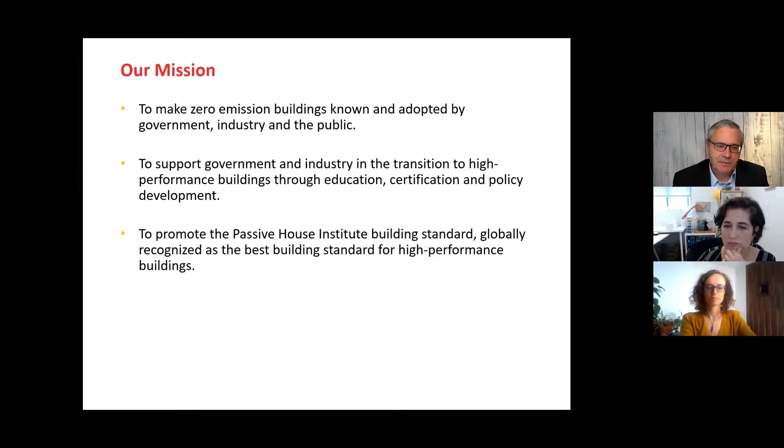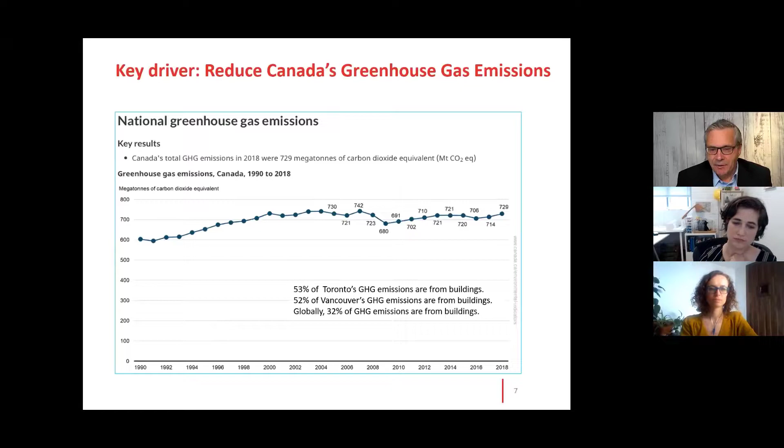So next, the need for high performance buildings. Here's the chart that talks about Canada's greenhouse gas emissions. You can see that it's relatively flatlined, which isn't a good thing if we're to meet our 2030, 2050 Paris Accord commitments to reduce GHG emissions. The argument is there's been real growth in Canada, and the increase hasn't necessarily reflected that growth, but we're still not getting to where we need to go.

Let's go on with the next slide. We know that buildings account for about 30% of GHG emissions worldwide. In Toronto, it's about 53%. Vancouver's about 52% of GHG emissions are from buildings. So clearly, focusing on buildings and reducing GHG emissions through our buildings is fundamental if the country's to meet its climate change targets.

Toronto is making progress, and here's a chart outlining Toronto's progress in reducing greenhouse gas emissions. It's about halfway to its 2030 target of a 65% reduction from 1990. But there's a lot of hard work ahead, especially when you consider that a large chunk of that reduction was because of the provincial coal phase out, the production of electricity through burning coal, phased out at the provincial level by premiers McGuinty and Wynne.

Vancouver, in contrast, has had about a 9% reduction since 1990. I use Vancouver as the contrast because that's the city that really sparked the revolution, I would say, for Passive House and bringing Passive House to the municipal level.

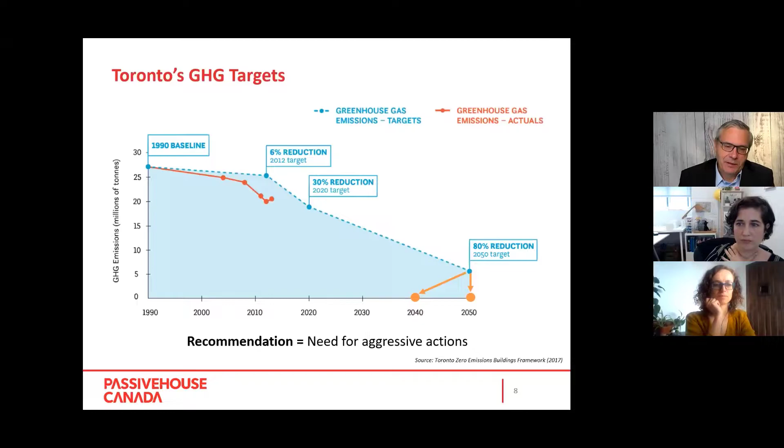Toronto's urban policies focus on greenhouse gas emissions. Their Green Standard version 3, that Marine will get into, means 100% of new buildings will be or must be net zero by 2030. So that's what we're doing in Toronto.

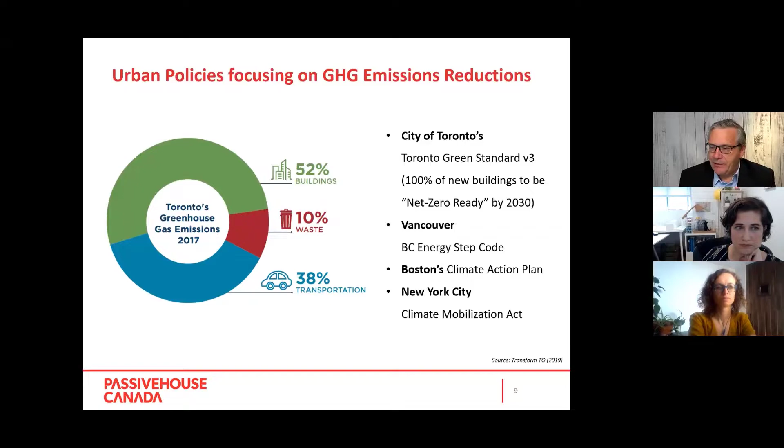In Vancouver, they rely on the British Columbia government's Energy Step Code, which takes them to zero emissions. Other cities in North America with notable policies include Boston's Climate Action Plan and New York City's Climate Mobilization Act.

So where does Passive House fit into all of this need to reduce greenhouse gas emissions? Well, if we look at the space heating needs of buildings in general, the average residential building in Canada uses 121 kilowatt hours per square meter per year of energy for space heating. Commercial is even higher at 203, but by adopting Passive House building principles, that's driven down to just 15.

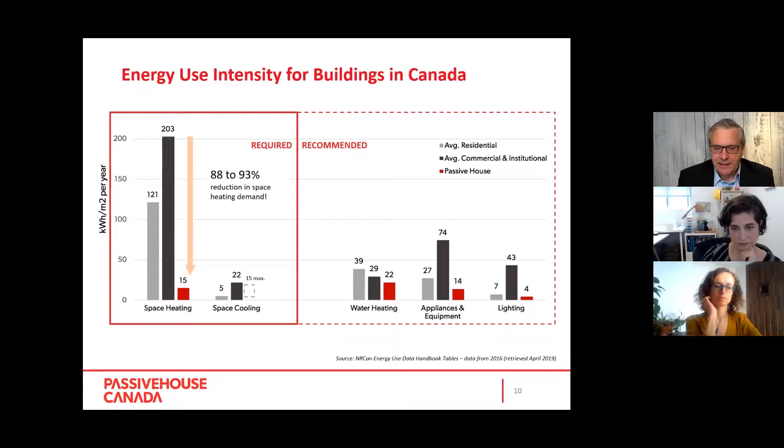So the chart on the far left is the one I'm focusing on here. There's a huge difference between 15 kilowatt hours per square meter per year and 203 in commercial and 121 in the average home. This is the operational carbon it takes to heat these buildings.

We talk about where the marketplace is going, marketplace transformation, and the need for government to act. But in many ways, government has acted. We have the Pan-Canadian framework from December 2016, where all of the provinces and territories sat down at the same table and decided that they would adopt increasingly stringent building codes to get to net zero energy ready by 2030.

The federal government's national building code is looking at net zero by 2050, and the Prime Minister recently announced even more ambitious targets by 2030. So all of the provincial governments are already on board, and the train has left the station, an electrified train, by the way. That train has left the station, and we are heading to that net zero world.

A lot of the work that we do at Passive House Canada is in educating and helping businesses and government in that transformation. A lot of the work we do is working with municipal governments to meet their climate emergency targets, their GHG emission reduction targets, by adopting Passive House standards in their building code.

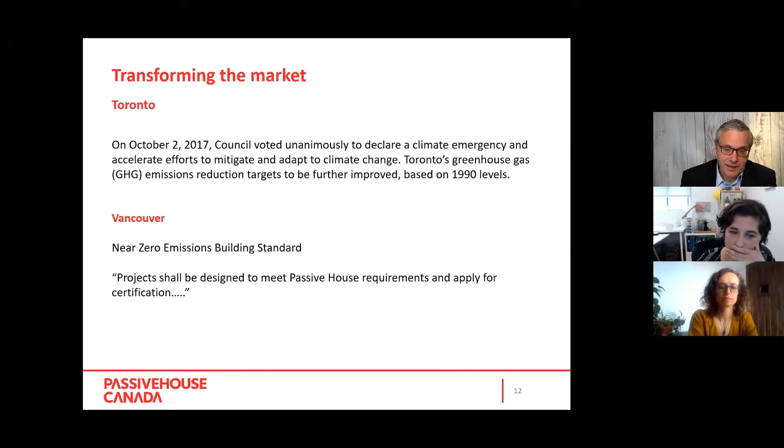So the marketplace isn't about to be transformed, it is in the midst of transformation, which is why we believe it's important that as many professionals in the business, as many policymakers as possible, know about the transformation and are prepared for it, and Canada isn't caught flat-footed.

So we know that governments seeking to create sustainable communities are considering building codes based on the Passive House approach. As we like to say at Passive House Canada, build better, feel better. That's the Passive House way. And this is my tip of the hat to the urban planning that needs to go on, working with architects, engineers, developers and builders so that we build those sustainable communities of the future. Passive House can play a very important role in helping us get there.

Next slide, please. And I wanted to talk about, because I know we're focusing on multi-unit residential buildings, I want to give you some sense of just how big the Passive House movement is internationally.

This is the suburb of Heidelberg, Bahnstadt. It's an entire community that over the past 12 to 15 years has sprung up. Every single building is a Passive House building. There's a multitude of forms. One of the Passive House myths we like to bust is that if you're building to Passive House, you have to have tiny little windows that don't open, and all the buildings have to be squares. That's not the truth. Here's four buildings: a fire hall, residences, some office space, and a nursery school, all built to Passive House over the past few years in this new community.

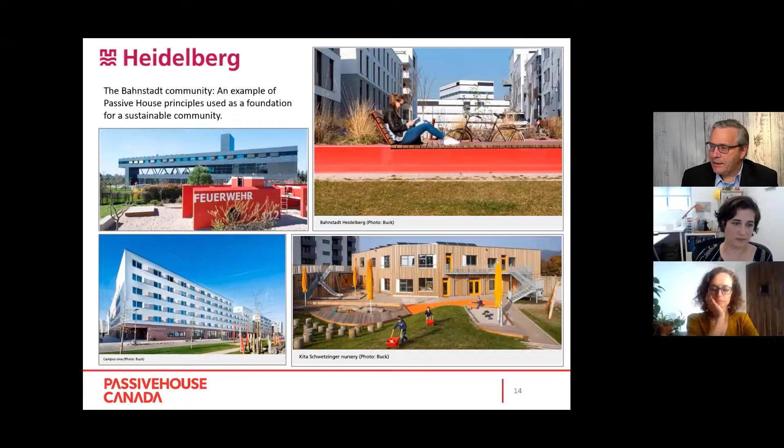Next slide. And some more buildings from Heidelberg, again home to 6,800 people, with a variety of different residential buildings there. So it can be done, it can be done on scale, and we're happy to support the growth of Passive House right across Canada.

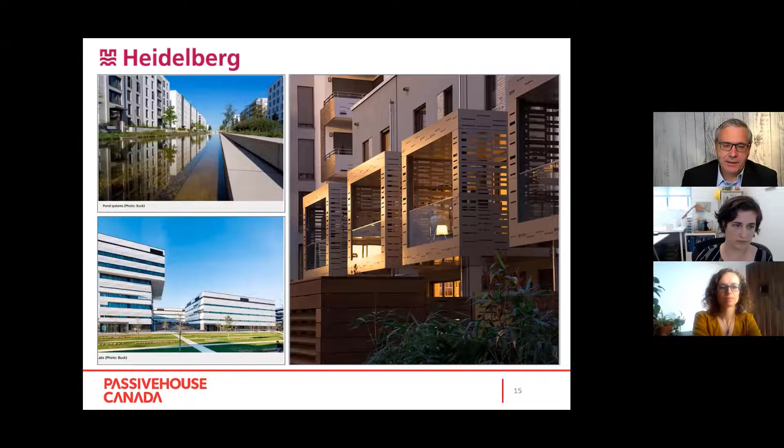So the question is, I talked a little bit earlier about energy use and operational carbon in a Passive House, defining a Passive House. But the question remains, what is a Passive House?

Next slide. Well, a Passive House from the outside pretty much looks like any other building. It's a very basic concept: keep the heat in during cold months, keep the heat out during hot months, while continuously improving indoor air quality. Those are the fundamentals. Passive houses can look just like virtually anything else that's out there.

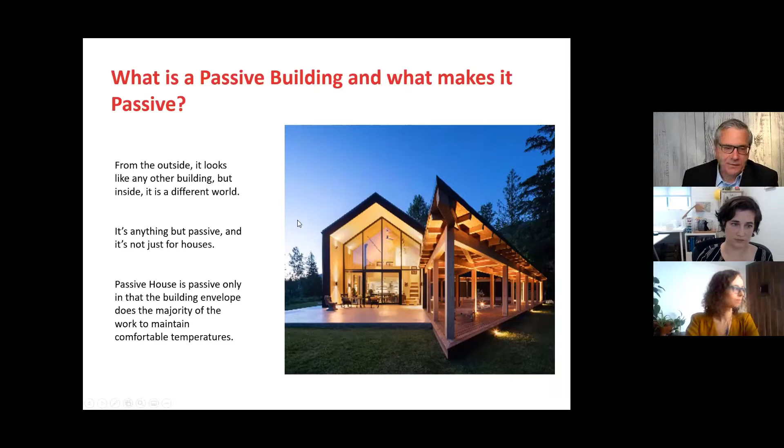Next slide. And in fact, here are some Passive House buildings built in Canada. You can see from these pictures that there's a variety of different looks, shapes, and building materials. I think that's one of the reasons architects love Passive House, is that it is not a check-the-box approach. You're allowed to use whatever materials, whatever form you want to meet the outcome.

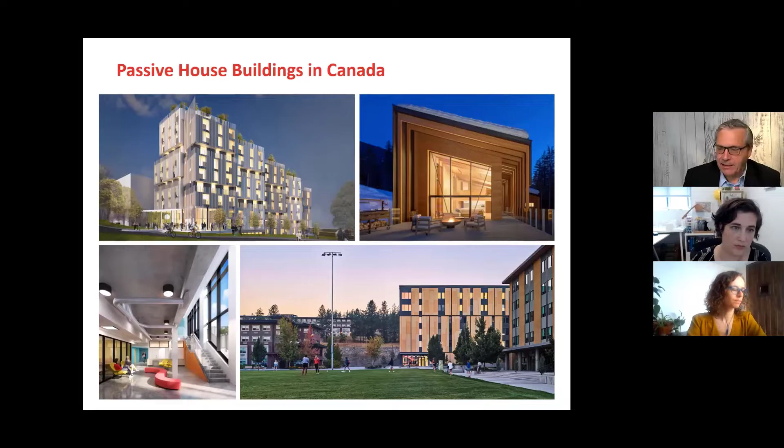So Passive House is an outcomes-based standard. How you get there is up to you, but in order to be certified Passive House, you have to meet a number of those performance-based criteria — things like energy use, air exchanges, and air tightness.

Okay, there are traditionally five principles of Passive House building. We've added another one that you need to know about. The first thing to start with is building massing. The more creative the design, oftentimes the more difficult it is to achieve a Passive House outcome. It's one of the most important things you need to start with.

Next is that you provide super insulation in the building — I won't get into the U value, but lots and lots of insulation in the walls, the foundations, and the ceilings.

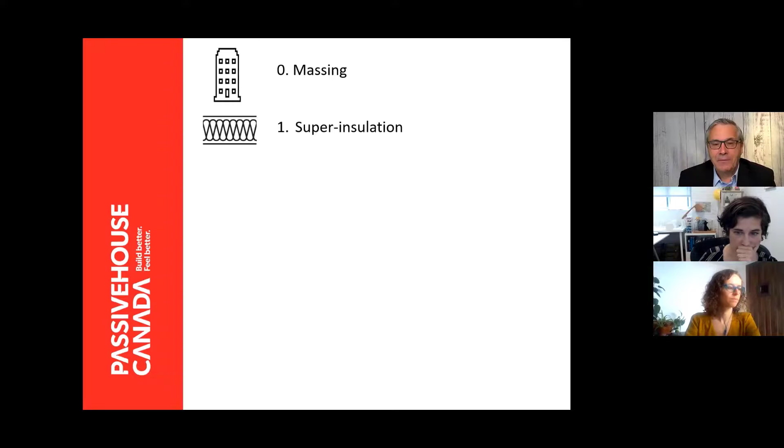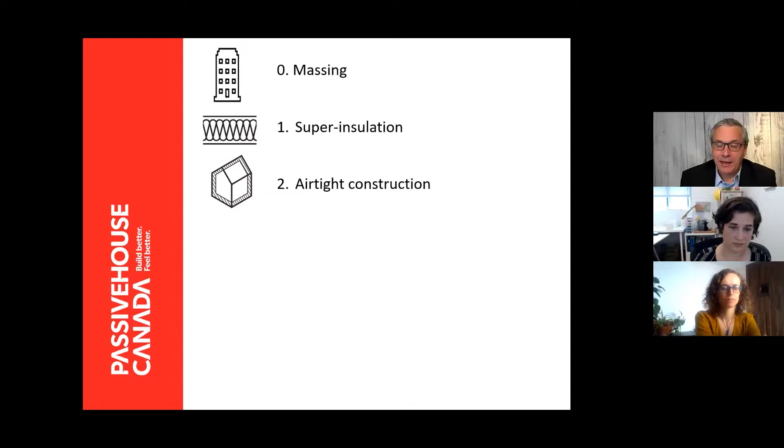Third — or second, we'll call it — is airtight construction. This is where Passive House folks are quite fanatical about making sure the building is extremely airtight, keeping hot air in during wintertime and hot air out in summer. We also need thermal bridge-free construction, which can be difficult, but we know how to achieve that even in large buildings.

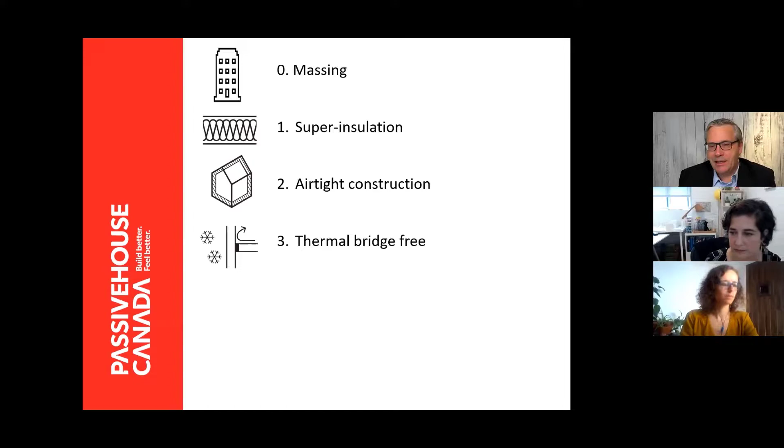Fourth principle: high quality windows. These would generally be triple pane with a low-E coating and some type of inert gas separating them, oriented for solar gain where possible. The fifth is a really good quality ventilation system, especially important when you consider that these buildings are airtight, so we have to make sure lots of fresh air is being brought in, and the energy from the outgoing air is transferred to the incoming air.

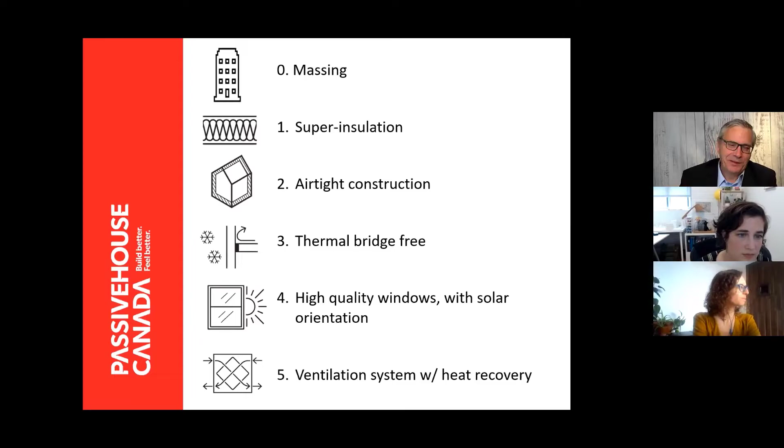So those are the six principles of building to Passive House. Next slide. So why build though to the Passive House standard? Well, all the focus to this point has been about energy efficiency, and Passive House is perhaps the most energy efficient way to build.

Interestingly, passive house was initially designed for a comfort standard—it has an ISO comfort standard attached to it. So it was a system designed to provide comfortable, healthy indoor air quality. If you build our way, you get a more durable building, one that's energy efficient, has lower GHG emissions, and is exceptionally low cost to operate. These are just some of the key benefits of building the passive house way. But we like to tell people we're more than energy efficiency—we're really focused on comfort and health. And if you build it the right way, you also get energy efficiency.

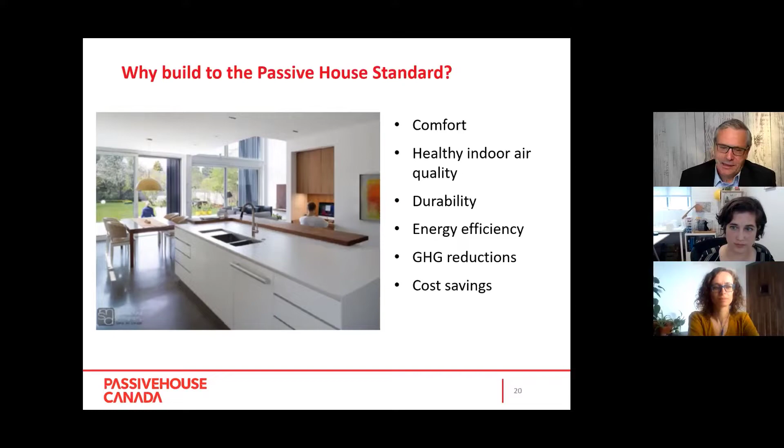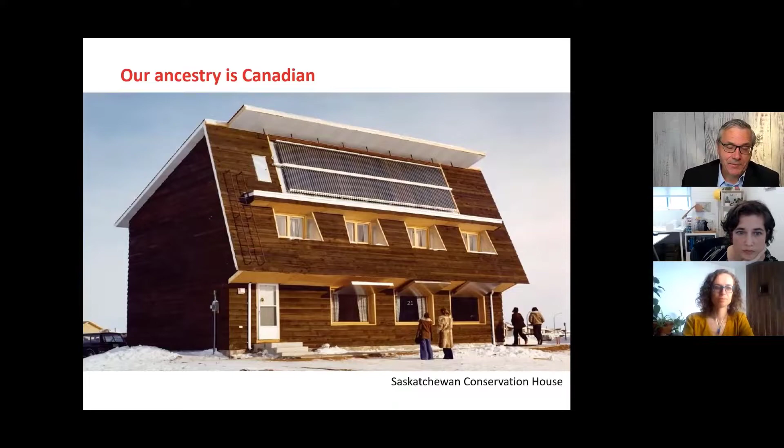So I'm going to turn this over now to Marine, who can take us through the Toronto Green Building Standard version 3. Marine, take it away. Sounds good—thank you, Chris.

Chris explained what a passive house is and its key principles. Before diving into the Toronto Green Standard version 3, we wanted to highlight that passive house is recognized as an alternative compliance path to the highest tier. The city of Toronto, like quite a few other cities, has the goal of having net zero ready buildings by 2030. This is where we need to be for a chance at climate change mitigation. This 2030 end goal is very comparable to passive house.

So what does this mean when Chris was talking about that transformation? The first thing I want to highlight before diving into the Toronto Green Standard, also called TGS, is that across the whole industry moving to high performance buildings, there's a shift from using reference buildings—a percentage better than code or something else—to absolute performance metrics. I think this is key to recognize. So what are these absolute performance metrics?

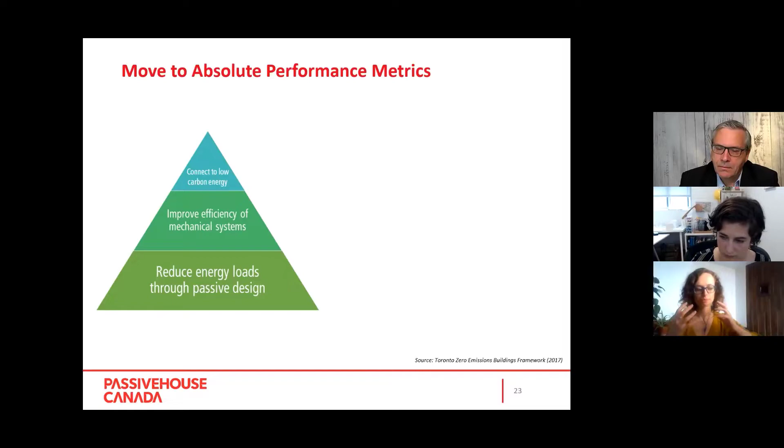You'll recognize on the left of the slide the typical hierarchy of working through passive measures first: reduce your demand so that you waste less. Once you've reduced that demand, meet it through energy efficient systems before even looking at renewables. So the metrics follow that hierarchy.

The first metric I want to spend a little time on is what we call the thermal energy demand intensity, the TEDI. TEDI is the new guy in town, because the other two metrics you'll say, 'oh Marine, that's fine, I know what you mean, we've talked about this before.' But the thermal energy demand intensity is that new metric included in quite a few performance standards, including Passive House and TGS. So what is the TEDI? It's literally the amount of heating you need to keep your building comfortable throughout winter. It's that simple—it is your space heating demand.

So you can see that by setting that TEDI metric, we are actually going to pay a lot of attention to the enclosure, which we haven't done before. Next is your total energy use intensity, your total EUI, or TEUI as you might have heard before. This is fairly obvious to everybody, it's the total amount of energy your building needs to run. So rather than zooming in on the enclosure, we're zooming out again to look at how much are you charged at your meter, because this is where your building needs to operate.

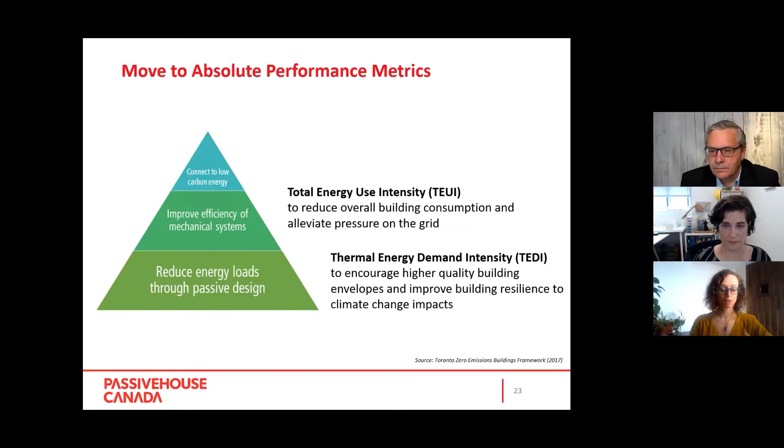Okay, so two very good metrics, but it doesn't tie us back yet again to climate change. Therefore, the third metric is what we call the greenhouse gas intensity, which is recognizing that not all energy is created equal. So where is your energy source coming from? Is it gas or electricity? Is it renewable or not? Which means that you're then translating the amount of energy you need into a carbon impact related to your building.

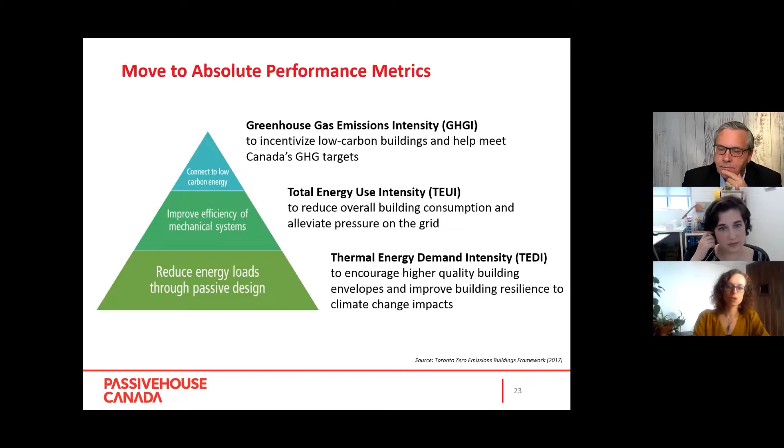So these three absolute metrics are metrics that we keep seeing absolutely everywhere in every single climate change policy we're seeing, right? And TGS, the Toronto Green Standard version 3, is no different. So if I zoom now to TGS version 3, tier 4, this is the highest tier, this is the 2030 target, this is the end goal, this is what we need to build, and this is the only thing we'll build from 2030 onward.

If I give you the exact figures, you're going to recognize the criteria right in front of you. We have a thermal energy demand intensity, a TEDI, of no more than 15 kilowatt hour per square meter per year. You remember when Chris presented the difference between what buildings typically use and where they can go down if they are a passive house? This is that 15. This is that 90% reduction compared to what we normally deliver.

You do need a whole building air tightness test just to understand how much we're leaking in what we build. You have a total EUI, a total energy demand intensity of around 70, and a greenhouse gas intensity of no more than 5 kilograms of CO2 per square meter per year. So these are all your operational targets to get down to buildings that we call net zero ready. So these are the Toronto Green Standard tier 4 targets for energy.

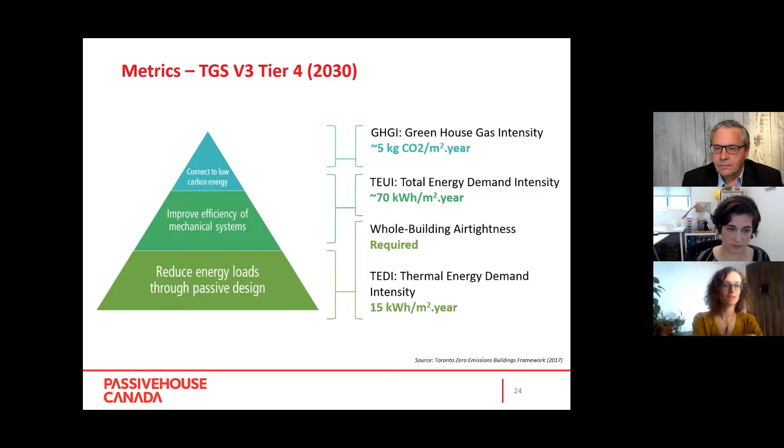Now, if I just translate these into passive house, you're going to see how much synergy you get between the two. Here are the passive house targets. Well funnily enough, if I start from the bottom again, you're going to recognize exactly the same number for heating and for cooling. So we get just two different buckets, one for heating, one for cooling, but they're almost identical.

You need whole building air tightness, and this time you have a number that gives you a pass and fail criteria. You have a frequency of overheating, because passive house, as much as it's an amazing energy saving standard, it actually comes from comfort. So that criteria is just ensuring that you're maintaining that comfort in summer as well. We're not just focusing on winter.

And finally, you get a target that is called primary energy renewable, which is around 60 kilowatt hour per square meter per year. And that sounds a bit funky, I'll give that to you. But what you have to think is that passive house target called the PER, the primary energy renewable, is simply a combination of your EUI, how much energy you use in your building, with your greenhouse gas intensity, which is where your energy is coming from and what is the carbon impact of each energy source. If you bundle that together, you get the PER.

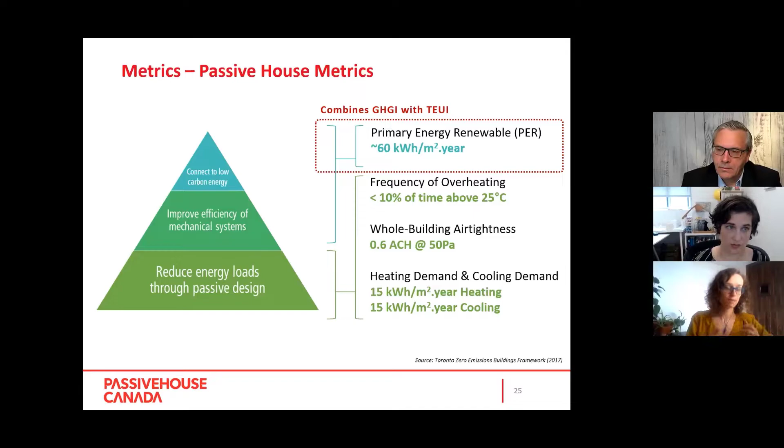So you can see that we're getting a lot of synergy between the two. Hence, passive house being an alternative compliance path to tier 4.

No matter which archetypes we're picking, we're ending up with a building that looks awfully like a passive house, because our space heating demand is really tiny. Our total energy consumption is reduced by at least a factor of 2, if not 3, compared to what we typically deliver. And our greenhouse gas intensity is very low, which is that electrification train that Chris was talking about. So you can see a lot of synergies between the two, and the end goal is to deliver buildings by 2030 that are passive house levels of performance.

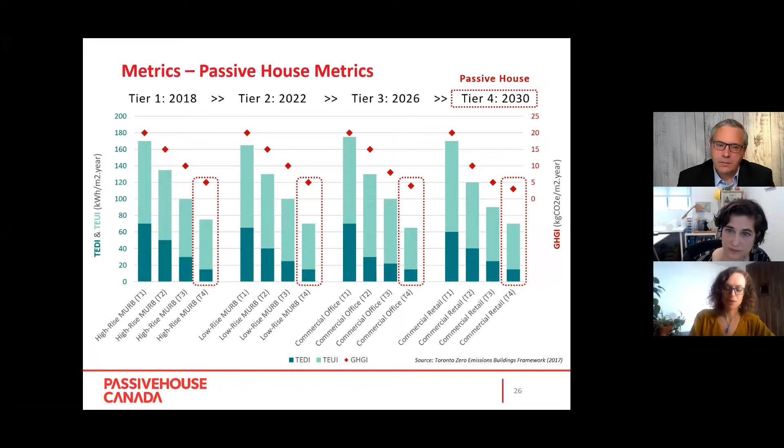So having talked about TGS, I've given you the technical figures. I wanted to touch base on the soft skills and the different approaches we're seeing for these buildings. So what I'm trying to do is digest literally 10 years of passive house delivery into just a few slides to say, well, it is technical. We need to achieve all these performance targets that we've set.

But at the end of the day, it is never the technical capabilities that are stopping us from delivering passive house buildings. To me, it seems that the soft skills and changing the way people act and think and design is what is giving us more barriers to get there. So having thought about how the process will differ when working with high performance, especially passive house buildings, I wanted to summarize that in a few slides.

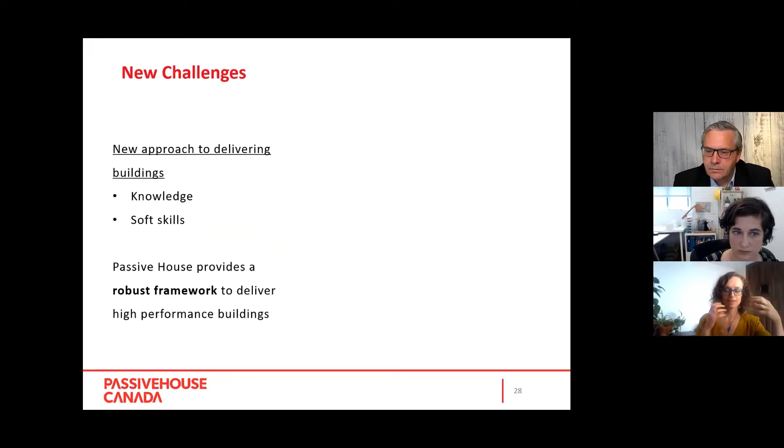We need new approaches, and I've tried to divide the challenges I found into 4 different parts. The first one is around design processes, the second around communication, the third around that new approach we call energy budget management, and the fourth around commitment and the team.

So if I dive into challenge number 1, the design process: we are used to a top-down approach. We design the building first, following from the client to the architect to a flat design team. By designing the building first and checking the performance second, it has worked for us up to now, but when we move to these 2030 targets, it's not going to work anymore. So that design approach is going to be superseded really soon.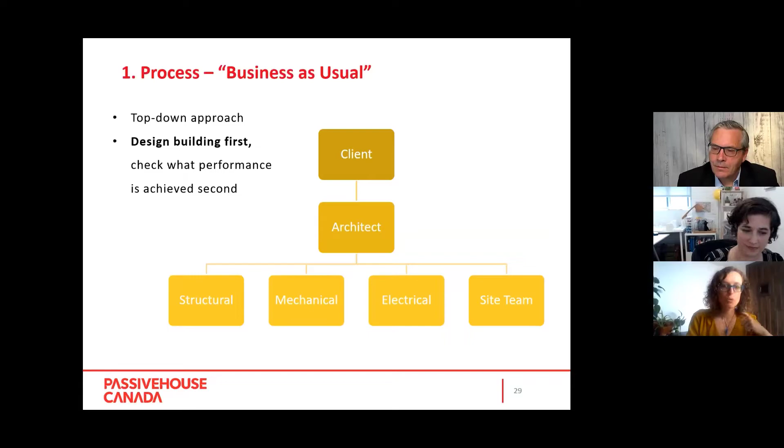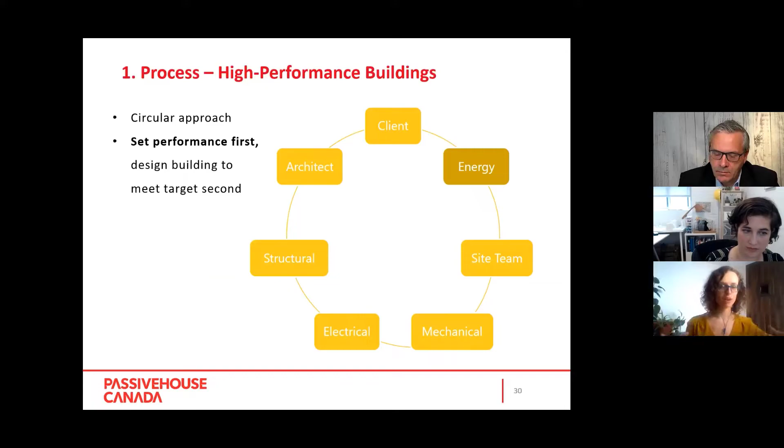So this approach doesn't work anymore. We need to move to a circular approach with a fully integrated design team, which makes us set the performance first and design around it. So we would in effect reshuffle and redefine the play area we can evolve in to design buildings, to be able to set that performance and meet it.

And what is new with that approach? First, a ton of communication everywhere that you can see through the graph. And second, a quality assurance process to say, I love that you had a really good intent, but it doesn't matter what intent you have. I need to know what you delivered. And this is what quality assurance is all about.

Okay, still thumbs up for hearing me kind of half okay through the drill? Okay, thank you so much for bearing with me.

So you can see that we are like, a designed intent is not enough anymore. We need that quality assurance. We need to prove that we're delivering okay. And that takes a lot of communication.

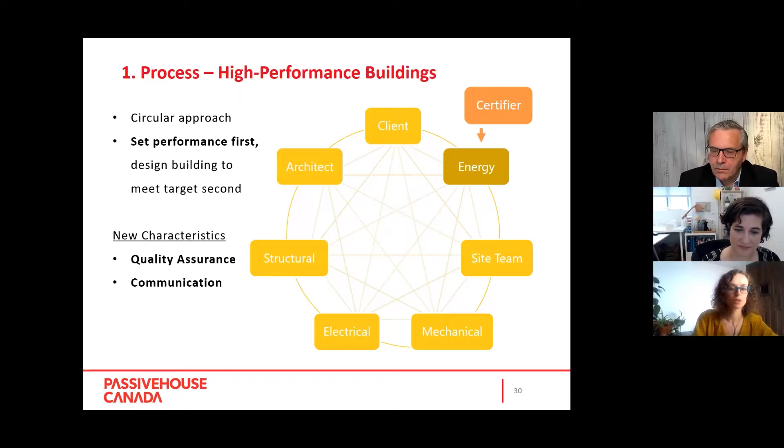But we do need to be clear to be able to maintain performance. So quick example, maybe with planning requirements. Let me be completely fair. I look at a building from an energy standpoint. It is my job, it is my goal to make it use as little energy as it can to deliver what is intended. Well, when I face planners, they're looking at it from a very different perspective.

And the fact that we have different perspectives means that we might have either some misunderstanding, or truthfully, that for one same element, we might want 2 different things. And we need to talk together to find that best compromise, to say, well, what you're after is important, but what I'm after is important. So how do we meet in the middle and deliver what is intended? So that extra level of communication is really important, because let me be fair, there are code requirements, there are planning requirements, there are all kinds of requirements that are kind of not aligned with energy saving requirements, and we need to work through them to be able to deliver this building more easily. And it only goes through communication.

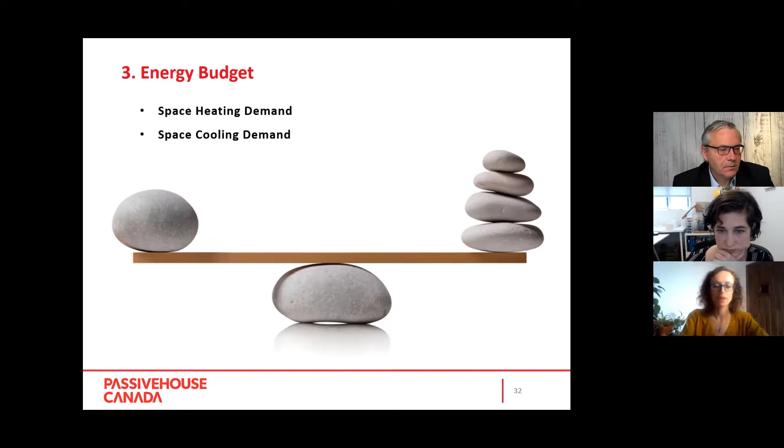So what am I meaning by energy budget, and why am I showing that balancing act on the slide right now? Well, if we go back to that first metric, you remember TEDI, right? This TEDI guy, or thermal energy demand intensity, it's the amount of space heating we need. So what does that mean? For me to feel comfortable, I need all my losses to equal all my gains in my building. This is how I maintain my 20-degree temperature that I've decided I wanted. Okay, so this sounds really simple, but can we just write a line in our specification to say, I need a comfortable building, I need a building with a very, very low TEDI, a low space heating demand?

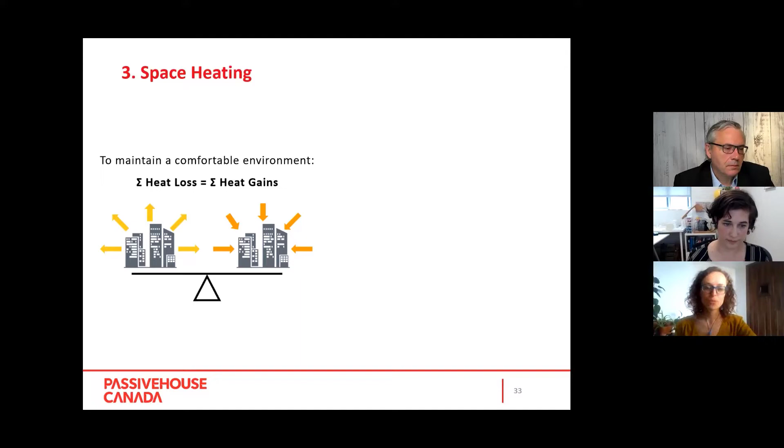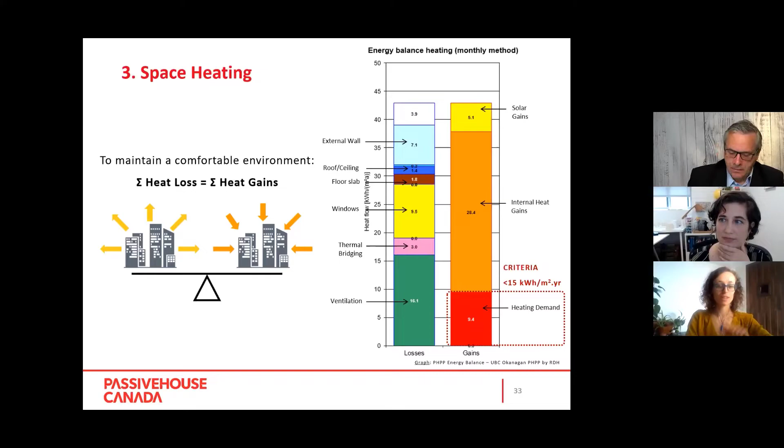So three challenges on, what is the fourth challenge? Well, for us, especially for me at RDH being an energy modeler, I am in charge of balancing all these blocks and telling my design team, yes, our red block is very, very low. What does it take for me to know how these blocks are adding up? I need commitment from my team, and I need to work with a front-loaded, integrated design process. If I need to guess how all my blocks are doing, I need the team to guide me really early on.

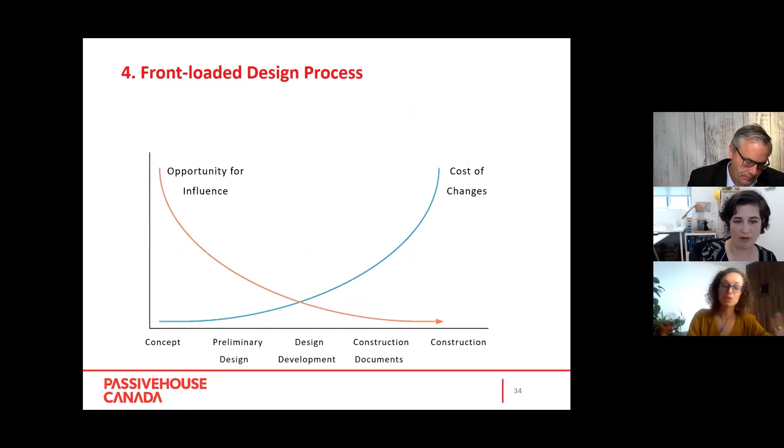So you all are familiar with this graph. I won't spend a lot of time on it, but spoiler alert, you need exactly the same thing for high performance buildings. By having an integrated and front-loaded process, you are going to work together as a team, and you're going to make key decisions early on and try as best as you can to stick with it. I know it's hard, but we're going to try.

So these are the four key challenges that we're seeing, and the four kind of different approaches that you're going to need to integrate for us to deliver high performance buildings, as if it was the new norm.

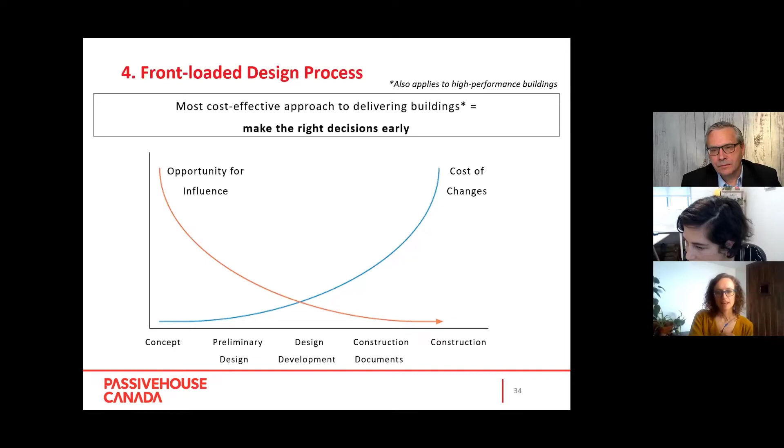So to summarize what we've seen today: absolute targets, it doesn't matter if it's passive house or not, absolute targets are coming. So everybody needs to be comfortable with these absolute targets and understand what impacts them, because this is our only way to 2030 net zero ready buildings. You can see it for passive house, you can see it for TGS version 3, and a few other municipalities' policies.

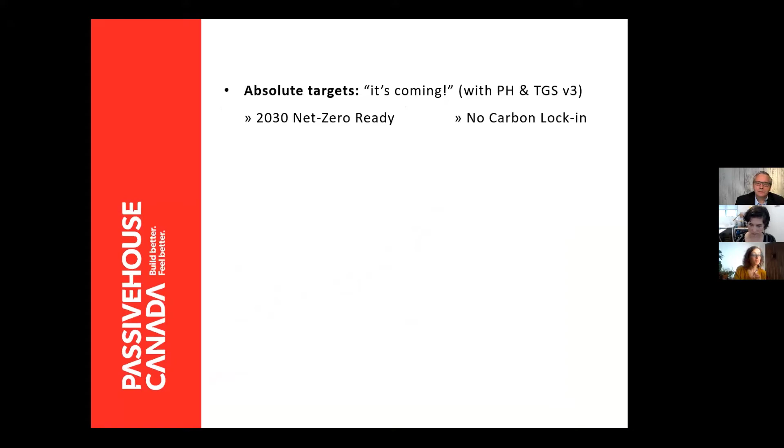You need to be comfortable with that energy budget management. Everybody in the design team, starting with the client, we need to understand what that energy budget management is, like our financial budget management. We set clear targets, we set them early, and then non-negotiable, because when there's no more, right? So that changes the approach we as an industry design buildings.

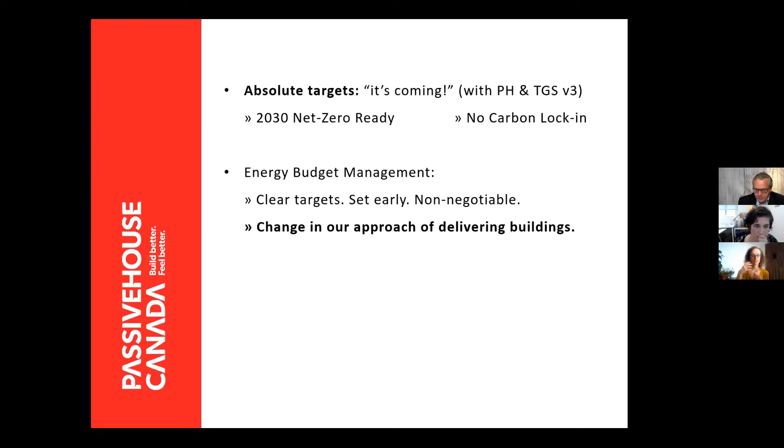And finally, it has to be an integrated design approach. It is a team sport. High performance building is a team sport. There's no two ways about it. If somebody decides not to play, it becomes really difficult to deliver.

So what do you need? A common language, extra collaboration, and clear communication, and having that understanding of that balancing exercise that I've shown for the budget, which can only happen through the whole team buying in.

I simply want to remind people, from a Passive House perspective, we are part of building sustainable communities. And we know that Passive House buildings are places that people want to live and work in. A sustainable community, in our mind, is a place that people want to live and work in, both today and in the future.